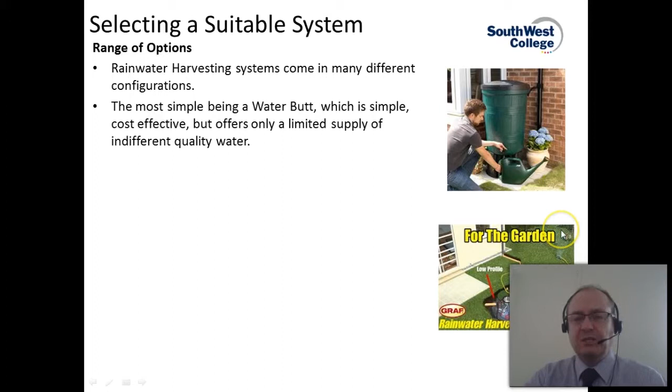Selecting a suitable system. Rainwater harvesting systems come in a variety of different configurations. The simplest that you've probably seen would be a rainwater butt, which is basically stuck to a downpipe in your garden and used for water irrigation. It offers a limited supply and the quality is indifferent, but does what it's intended for and provides some additional water for watering the garden.

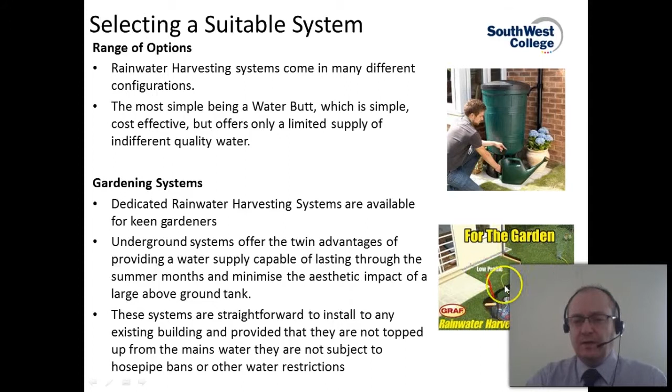You can get rainwater harvesting systems specifically for watering gardens, dedicated systems for gardening applications, and they tend to be underground systems. They offer the twin advantages of providing a water supply that can last through the summer months, and because you bury the tank, there are no aesthetic issues with an above ground tank. Also, these types of systems aren't subject to hose pipe bans, so long as they're not topped up from the mains. If they're only fed from harvested rainwater, any hose pipe bans don't apply.

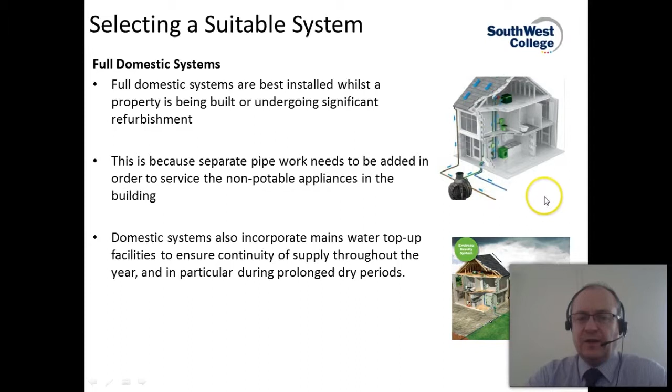Full domestic systems would be the top of the range. These are best installed when properties are being built or undergoing significant refurbishment, because there's quite a bit of disruption to running the extra pipes through the house. Domestic systems will generally always contain mains water top-up facilities to ensure continuity of supply throughout the year, and in particular through dry periods.

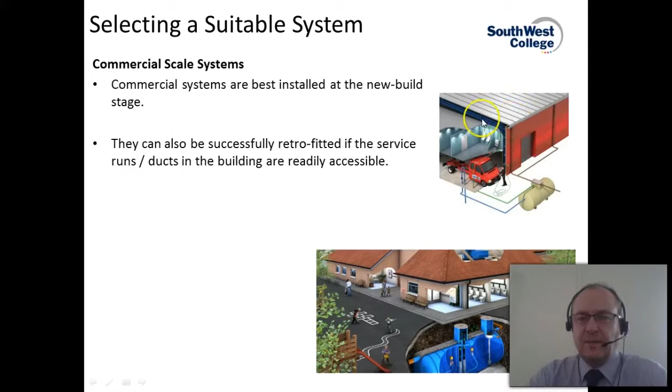Commercial scale systems are best installed at the new build stage as well, but they can also be easier to retrofit into commercial buildings, since these types of buildings tend to have service ducts running through them, making the installation or retrofit of pipework a lot easier than in a domestic installation. A wide range of rainwater harvesting storage tanks are also available to meet the high harvesting potential of many commercial buildings—think of large warehouses with large roof surface areas, offering excellent potential for rainwater harvesting.

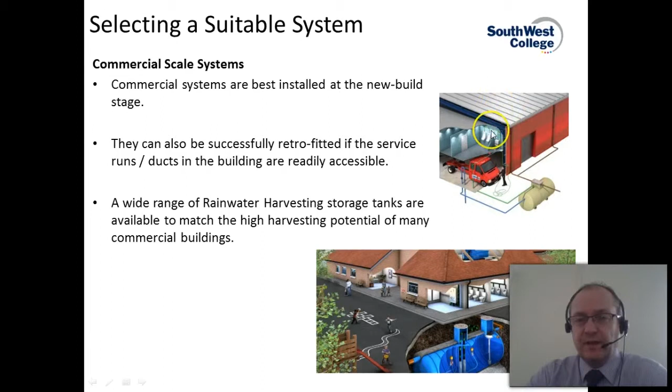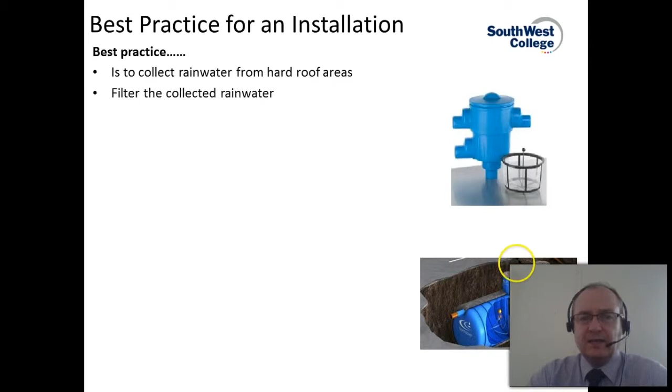Best practice is to collect local rainwater from hard roof areas where you can, to filter the collected rainwater, and then store it underground. That would be the best practice method to follow.

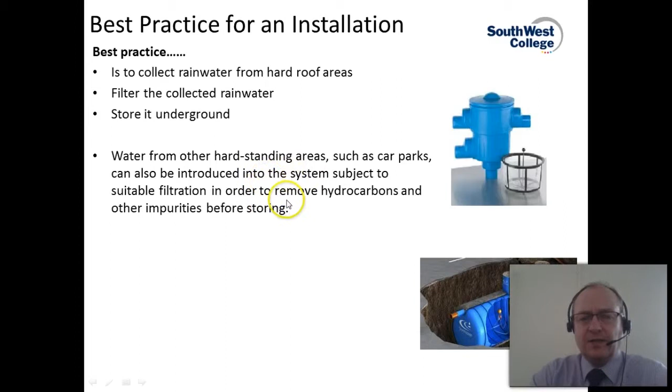Water from other hard standing areas such as car parks can also be introduced into the system, but you need to make sure it undergoes suitable filtration to remove hydrocarbons and other impurities before storing. For example, in a car park you may have diesel or oil that's leaked out of cars, which need to be removed. So there are additional filtration requirements for taking water off hard standing areas such as car parks. The best source is from the roof.

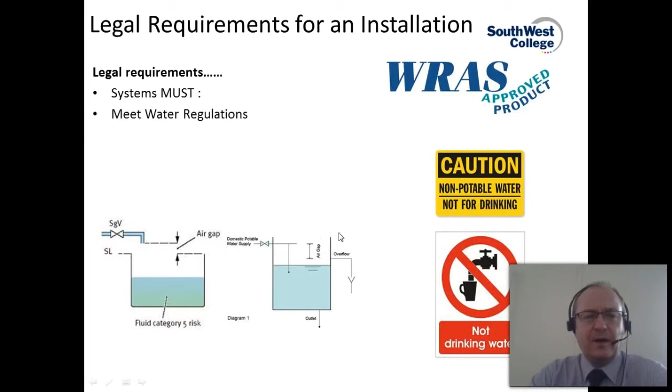The legal requirements for installing a rainwater harvesting system that need to be complied with are: it must meet the water regulations, and it must be separated from any mains backup by type AA or type AB air gaps. Basically, the domestic potable water supply feeds into the tank, and if the rainwater actually overfills the tank, there's no mechanism for it to be back fed along the domestic potable water supply. You need to leave an air gap so there's no way the water can fill up and go back along the pipe. In this instance, if the rainwater filling the header tank got too high, it would just leak over the top, and no rainwater could get back into the domestic potable water supply.

Similarly, on the one on the right hand side, if the rainwater reached a certain height, there's an overflow, so the water would drain off before it reached the domestic potable water supply and potentially contaminated the mains water. This is to comply with water regulations, ensuring there's no opportunity for the rainwater to get back into the potable water supply.

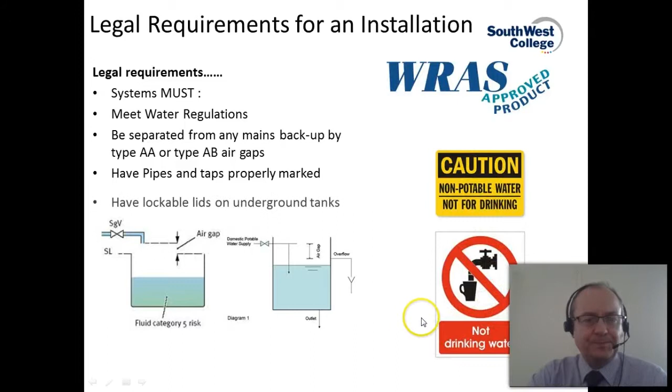You need to have pipes and taps properly marked—any tap with cold water that's not potable needs a caution or warning note stating that it's not drinking water. The underground tanks also need to have lockable lids on them.

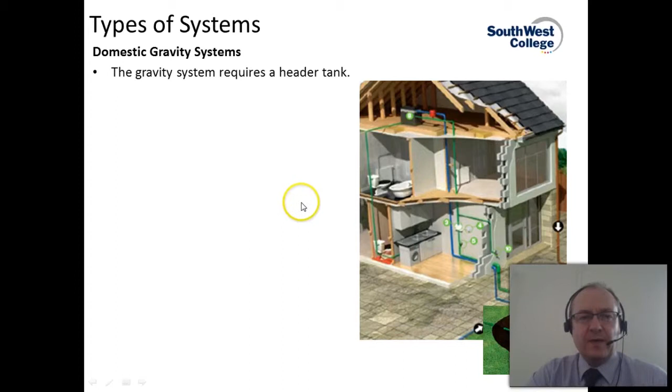Rainwater harvesting systems can be combined with typical domestic gravity fed systems. Your gravity system requires a header tank in the attic space or up above. This type of tank has two independent valves operating—both rainwater, which is the green pipe coming up to the cylinder, and mains water, which is the blue pipe. So it works on both.

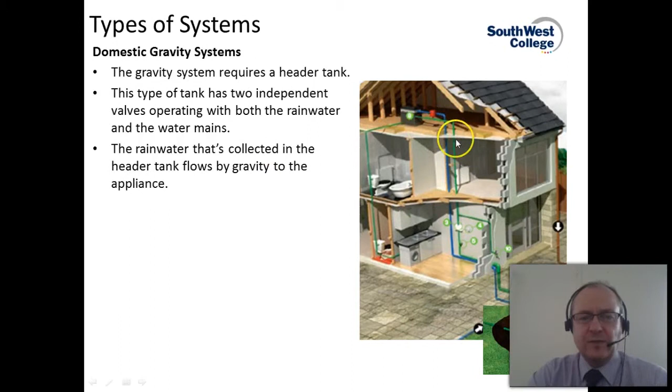In this example, the mains water comes in at the top, the rainwater is coming in at the bottom, meaning there's an air gap at the top from the mains so that the rainwater cannot get back into the potable mains water. The rainwater is collected in the header tank and flows by gravity to the appliances.

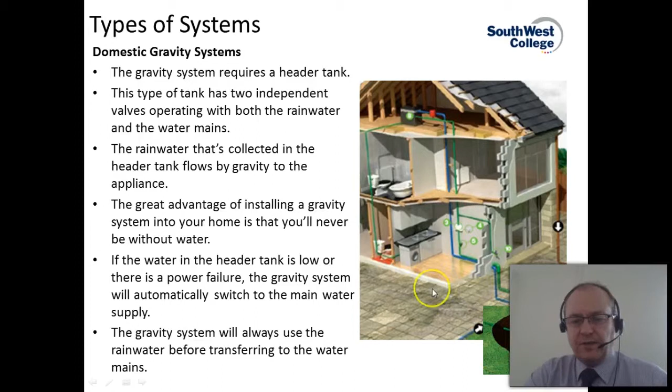The great advantage of installing a gravity system in your house is that you'll never be without water. You'll either have rainwater filling your cylinder, or it'll be coming in from the mains. Even if the main supply is cut off, you'll still have a header tank. If the water in the header tank is low or there's a power failure, the gravity system will automatically switch to the mains water supply. A gravity system will always use the rainwater first before transferring over to the mains, so your rainwater has priority.

And that there is basically the main components and an overview of a typical gravity fed system. Pretty straightforward, we've already seen that.

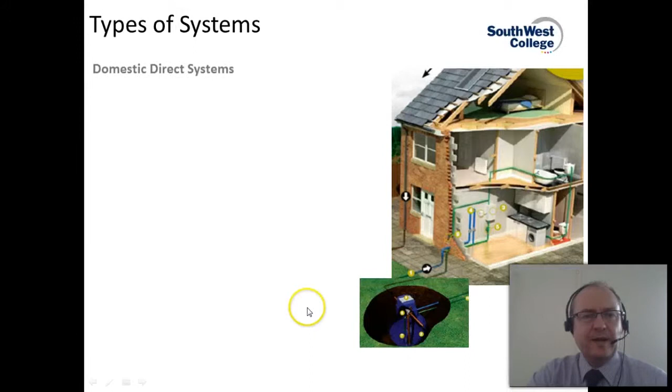Direct systems are also available, where a direct rainwater harvesting system is installed. These are generally installed where it's impractical to store a header tank above the property if there's no free space — for example, if you have a room in the attic space and can't put a header tank, you might want to consider a domestic direct system.

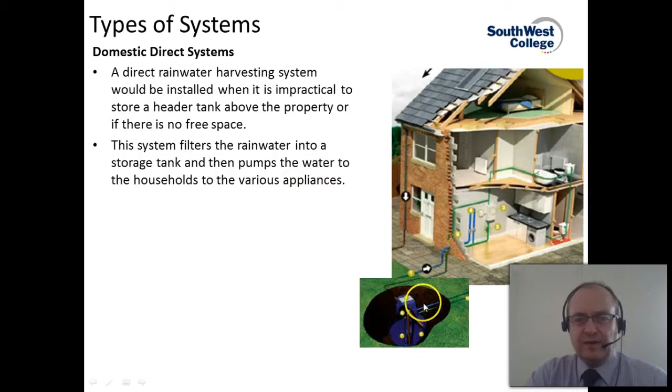The system filters the rainwater into a storage tank and then pumps the water to the various household appliances directly. The storage tank, your main storage tank, is connected to the mains water for top up, and it automatically changes over if the storage tank is low, ensuring you'll never run out of water. The storage tank is connected to the water mains, and they both come in here, so you'll always have a supply of water.

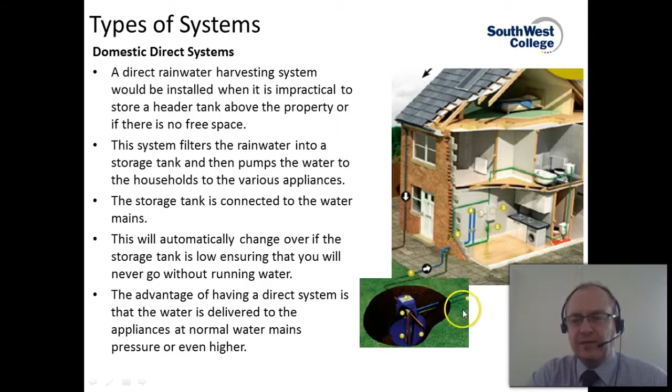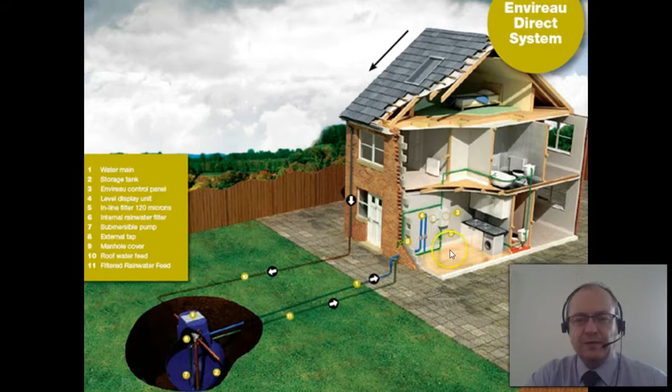The advantage of a direct system is that the water is delivered to the appliance at normal mains pressure or higher, so you'll always have high pressure water coming out your taps. In this system you can see the mains is the blue line, and there's your green line, which is your rainwater feed into the house. So you'll always have a supply one way or the other.

The combination system attaches both gravity and directly fed systems together, which is another option, and allows the gravity fed water to go to an integral booster for onward distribution to the appliances. Installing a combination system into your home offers the advantage of having both the gravity and the direct rainwater feed services.

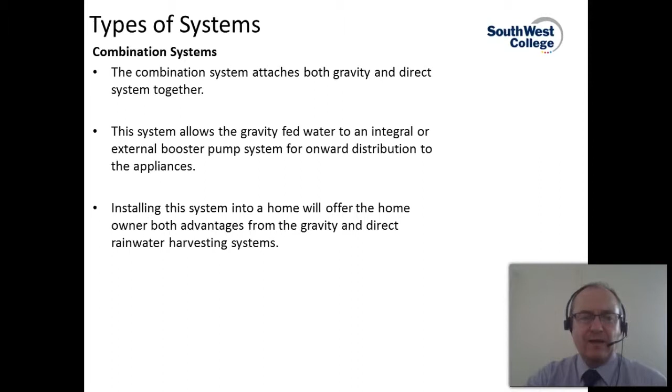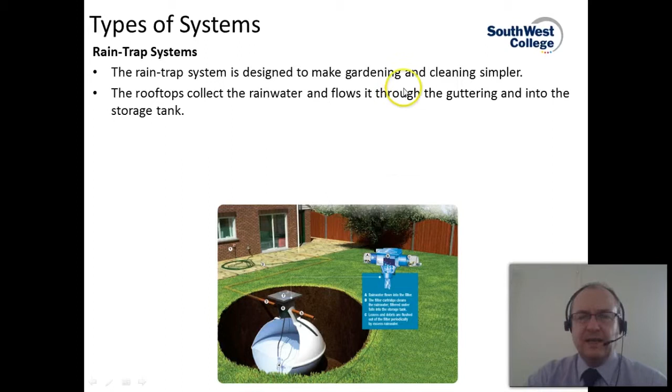Smaller systems you can get are rain trap systems. The rain trap system is designed to make gardening and cleaning simpler. The rooftop collects the rain and the water flows through the guttering and into your storage tank, and this is just for use outside of the house. Before it flows into the storage tank, it goes through a filter to remove leaves and debris collected along the way, and is stored underground until needed and pumped towards appliances such as sprinklers and garden hose pipes, at a constant pressure from a little electrical pump inside the rain trap.

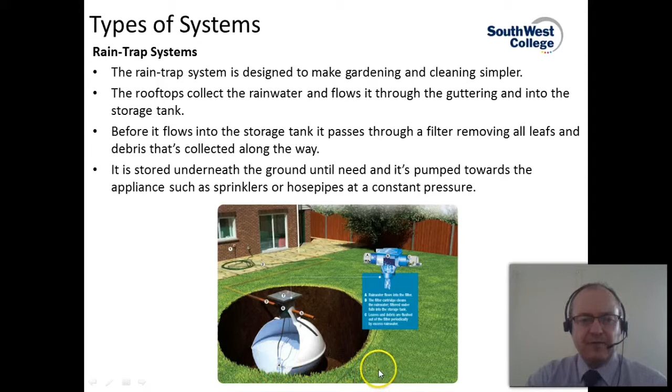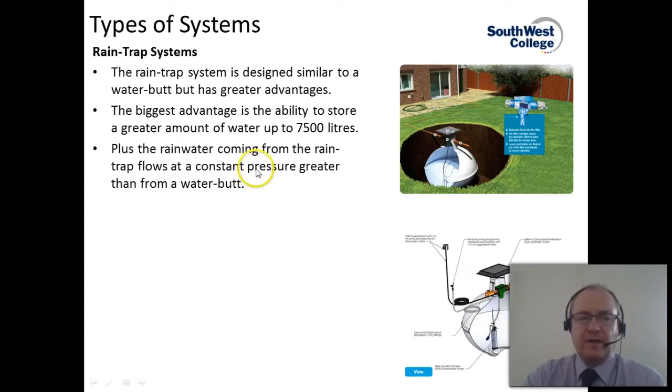Rain trap systems are similar to water butts but have greater advantages: firstly, they're much bigger, so you can store more water. The rainwater coming from the trap flows at a constant pressure, whereas the pressure coming out of a rain butt depends on how much water is in the butt.

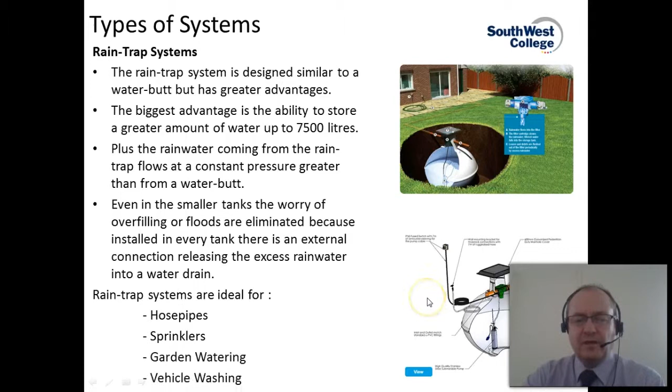Even with small tanks, the worry of overfilling or floods is eliminated, because installed in every tank there's an external connection releasing the excess rainwater into a water drain, so it never overfills — a little bit of a clever device. It'll top itself up, and when there's too much water in your rain trap, the excess just goes into the drains. Rain trap systems are ideal for garden hose pipes, sprinklers, watering the garden, and also for washing vehicles and washing pathways outside.

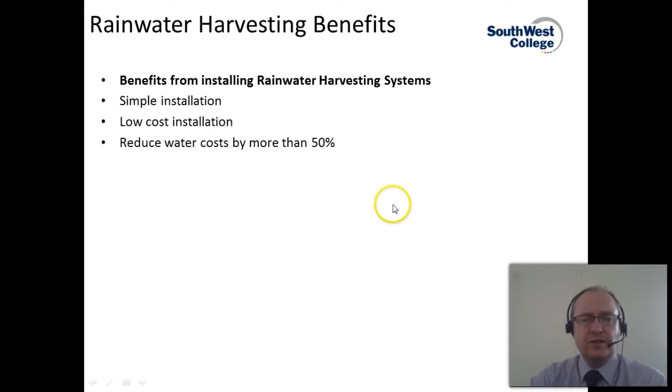In conclusion, the benefits of installing rainwater harvesting systems: they're simple to install, low cost installations, they'll reduce your water costs by more than 50%, and they'll beat the hose pipe ban if one's in place. They combine rainwater harvesting with simple operating systems. They're suitable for both new and existing homes — good for new builds and for retrofit.

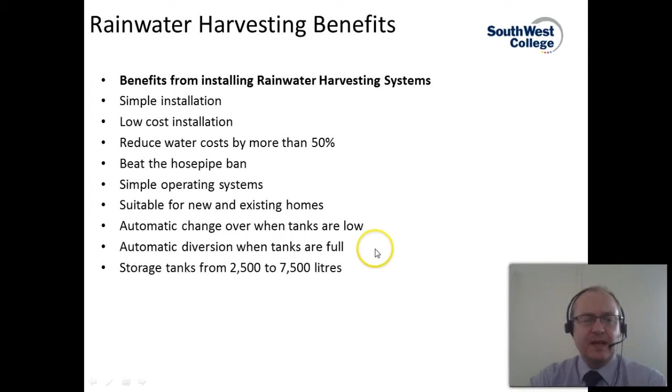The modern systems have automatic changeover when the tanks are low, so there's no interruption in service to the user, and automatic diversion technology when the tanks are full, so any excess water is just put down the drains. Storage tanks range in general for domestic applications from between 2,500 to 7,500 litres, and they have internal self-cleaning filters. That will conclude this section on rainwater harvesting.